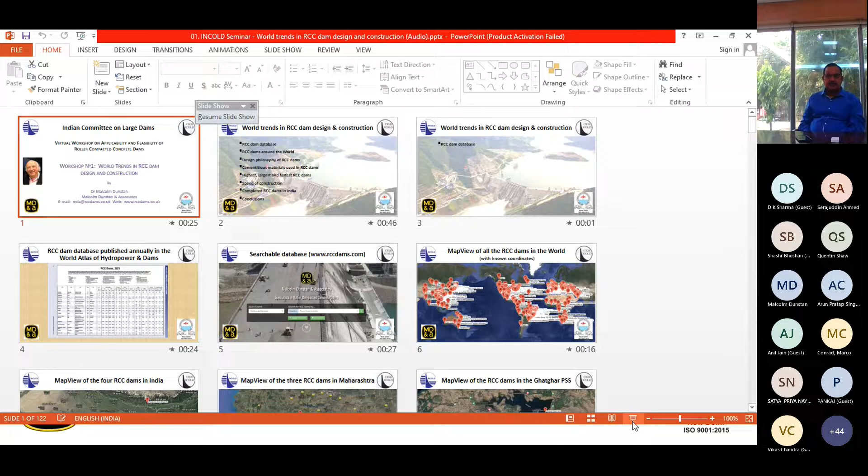I'll be talking about world trends in RCC dam design and construction, how things have changed over the last decade or so, and the position with RCC dams at this present moment. I'll first look at an RCC dam database that we've been maintaining for about 30 years. Secondly, I'll look at RCC dams around the world.

Then look at the design philosophies of RCC dams, the cementitious materials used in RCC dams, the highest, largest and fastest RCC dams, and then the speed of construction, which is the main advantage of RCC dams. And I'll look at the 4 completed RCC dams in India, and finally draw some conclusions.

As mentioned, we've been maintaining a database of all the RCC dams in the world for nearly 30 years, and a summary table of that database is published annually in the World Atlas of Hydropower and Dams, and this is the first page of the latest version. However, you can search for any RCC dam with the searchable database on our website.

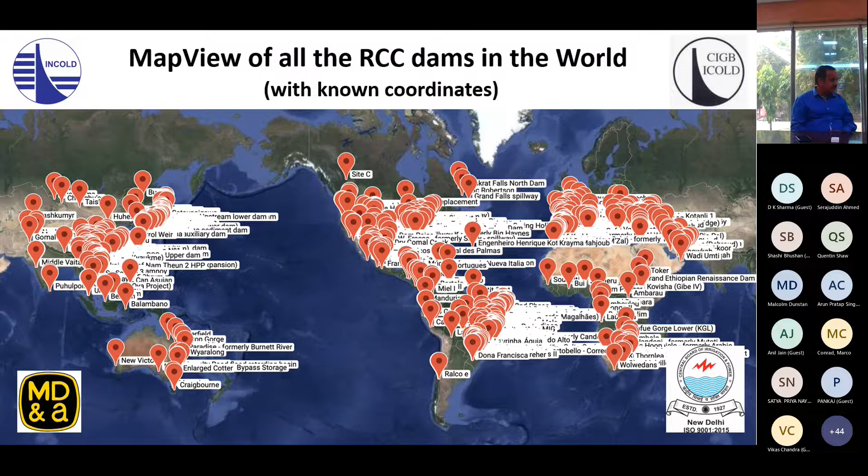And these are the 4 RCC dams which have been completed in India to date, 3 of them in Maharashtra and 1 in West Bengal, and I will talk about these later.

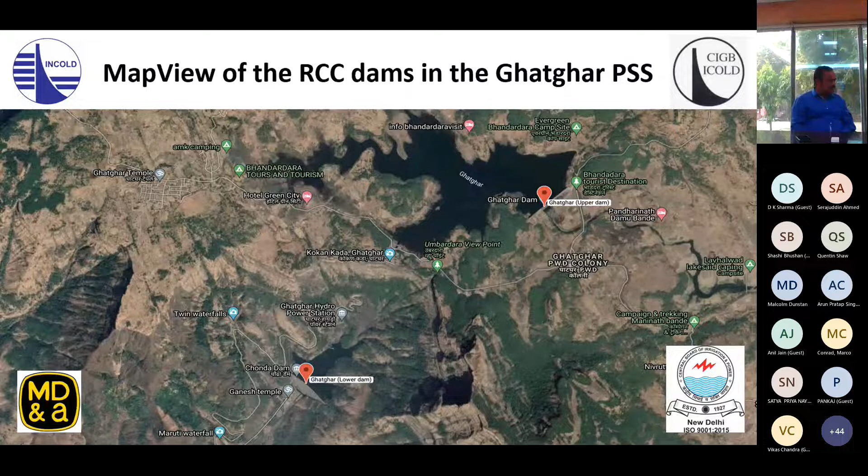These are the 3 in Maharashtra, Middle Vaitarna, the 2 dams at Ghatghar, the upper dam and the lower dam. Here is the Ghatghar project, which I'll be talking about later. And here is the Ghatghar lower dam.

Now the RCC dams around the world. I'll first look at the number of RCC dams and then the distribution of those dams around the world.

At the moment, there are 956 known 15-meter plus high RCC dams, for which we have details. Of those, 886 are complete with an RCC volume of 370 million cubic meters, and a further 70 are under construction with another RCC volume of 32.5 million cubic meters. In other words, there are over 400 million cubic meters of RCC in dams, either complete or under construction.

Of those dams, 805 are over 30 meters high, and of those, 741 are complete with a volume of 355 million cubic meters, and a further 64 are under construction with an RCC volume of 30 million cubic meters. 11.6% of the 30-meter plus high completed dams are arch or arch gravity dams.

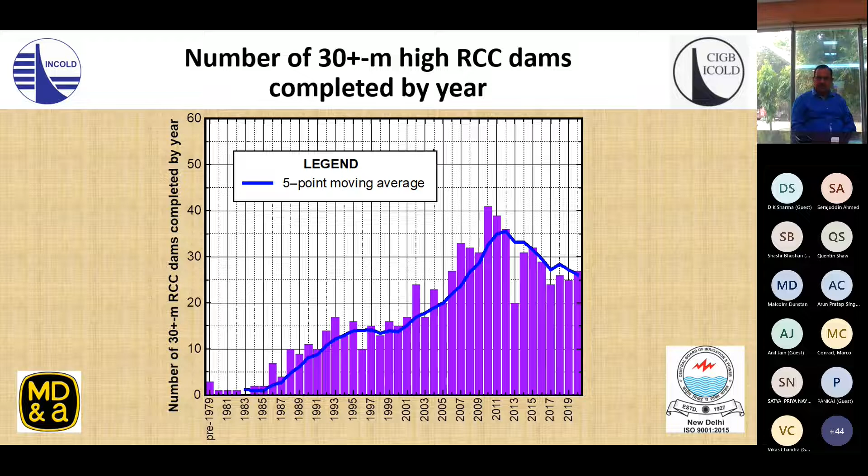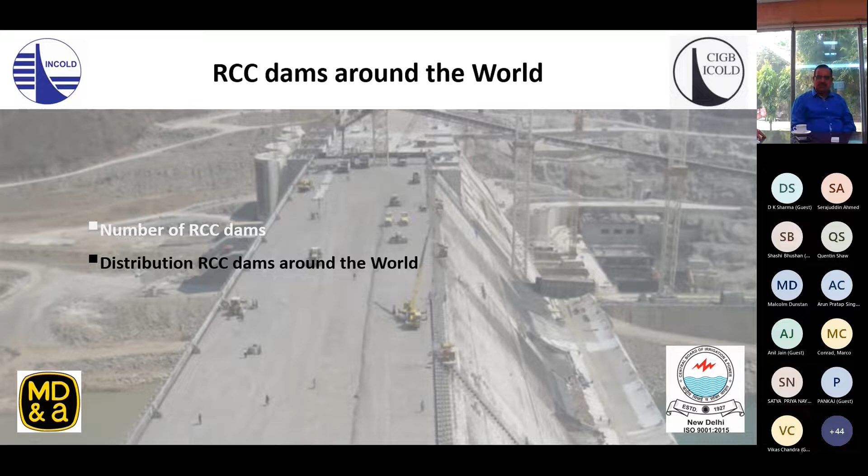If we look at the distribution pictorially, you can see that over 50%, in fact 53.2% of all the RCC dams are built in just 3 countries, China, Turkey and Brazil. And apart from those, the 12 mentioned before, the rest of the world accounts for only 18.6% of all the RCC dams.

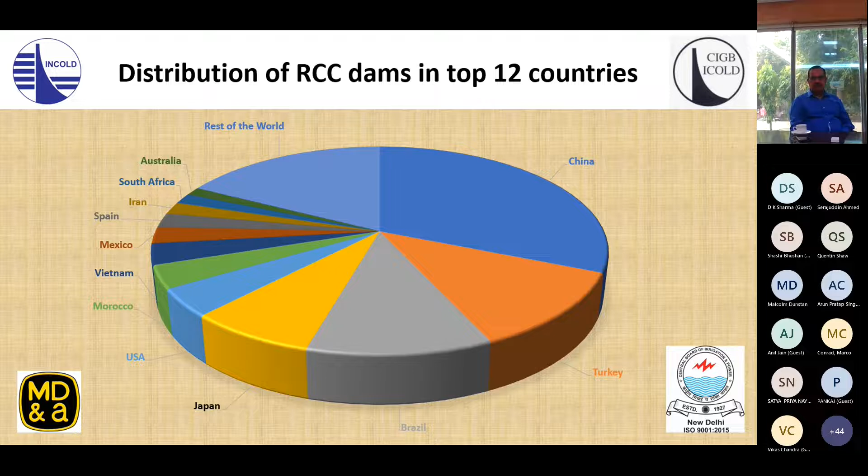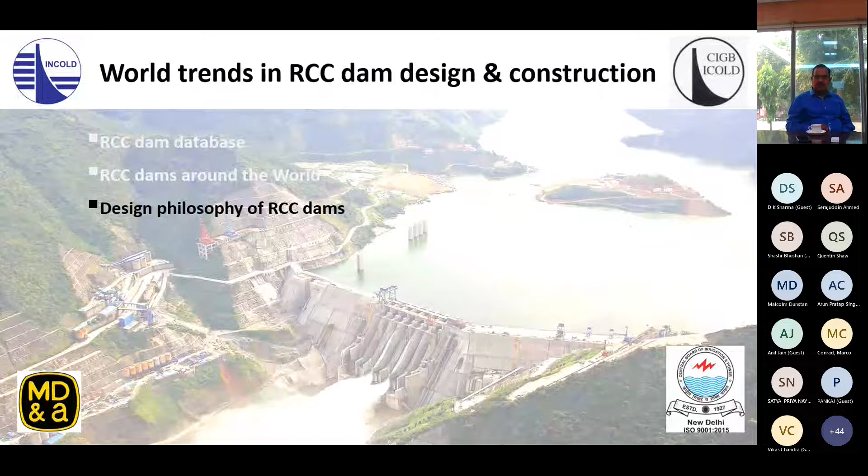We'll now look at the design philosophy of RCC dams. We'll first look at the different approaches to the design of RCC for dams. Then look at the proportion of RCC dams using those different design philosophies. And then we'll look at the average mixture proportions of the different design philosophies.

There are 5 approaches to the design of RCC for dams. The first one is for hard-fill dams. Second one is what's known as low cementitious RCC. We then have RCD dams in Japan, which are unique to Japan. And then we have medium cementitious RCC and high cementitious RCC.

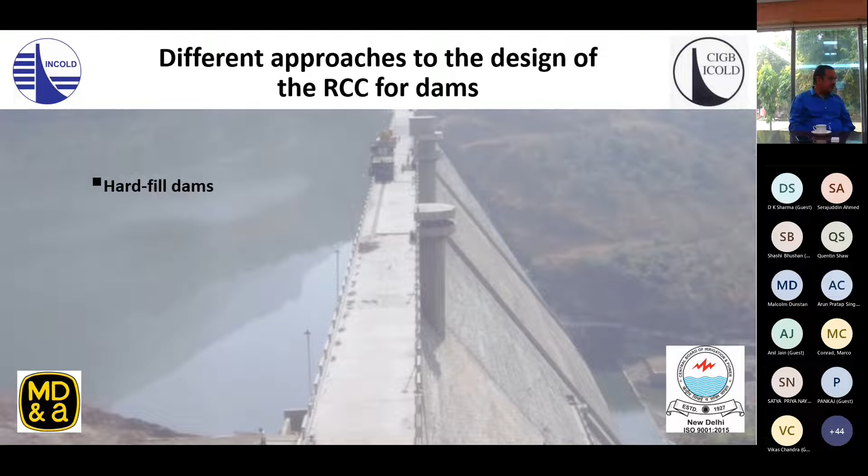We'll first look at hard-fill dams. Hard-fill dams are also been called CSG, compacted sand and gravel dams in Japan, and CMD, cemented material dams, in China. And this name has now been adopted by ICOLD, and there is now a separate ICOLD committee dealing with CMD dams. A hard-fill dam has symmetrical with equal or near equal upstream and downstream slopes, generally somewhere between 0.60 to 1 and 1.10 to 1.

The volume of the dam is usually significantly greater than traditional gravity dams. The cementitious content is relatively low, or surprisingly, it is in fact over 100 kilograms per cubic meter, 104 kilograms per cubic meter.

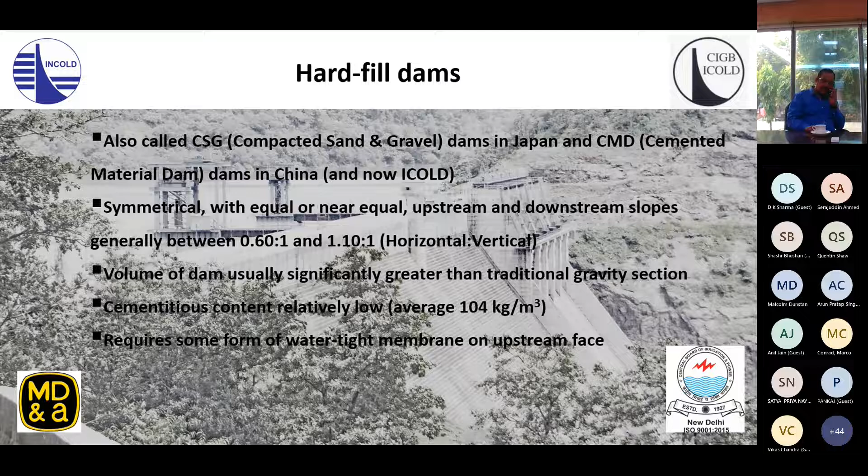Requires some form of watertight membrane on the upstream face. No treatment nor bedding mix is required in the horizontal joints because the design does not depend upon any shear strength or tensile strength of those joints. And no vertical contraction joints are required.

The first hard-fill dam in the world was a small dam in the southwest of the UK called New Mill. It wasn't called a hard-fill dam, it was just a solution to a number of problems. And there were 3 major problems.

The first was that the foundations were very poor, and so the load was spread with upstream and downstream slopes of 1 to 1.

The second problem was it had to be a concrete dam because it all had to act as a spillway, being a flood retention dam, but it is an area of outstanding natural beauty, and the planners did not allow any concrete to be shown. And the third problem was that the concrete had to come from a ready-mix plant.

The travel time from that plant could vary anything from 20 minutes to 2 hours, depending upon the traffic, as the dam was built in a tourist area in the summer.

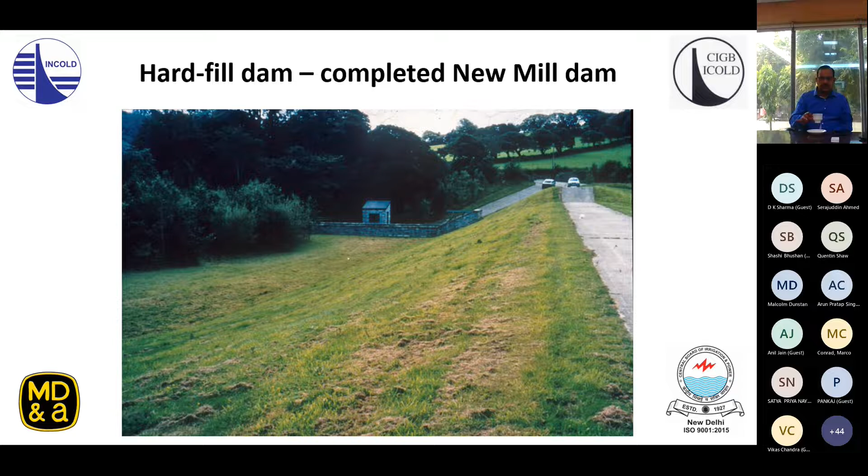Now let's look at low cementitious RCC dams. Generally, they have a gravity section, although the downstream slope can be flatter than usual. The cementitious content is less than 100 kilograms per cubic meter. The SCM, that's the supplementary cementitious materials, content is usually relatively low.

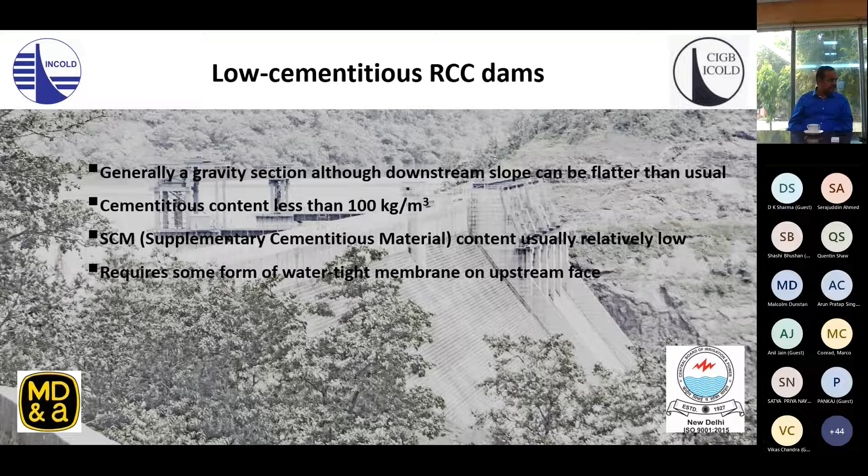It requires some form of watertight membrane on the upstream face. Frequently a full or a partial bedding mix is used on all horizontal joints. Vertical contraction joints are required.

Here is a photograph of probably the most typical and the first low cementitious RCC dam, Willow Creek. It's under construction in the USA. You can see from the photograph the RCC was transported by scraper, which is, I think, fairly unique. It was spread by a dozer and then compacted by twin drum vibratory rollers.

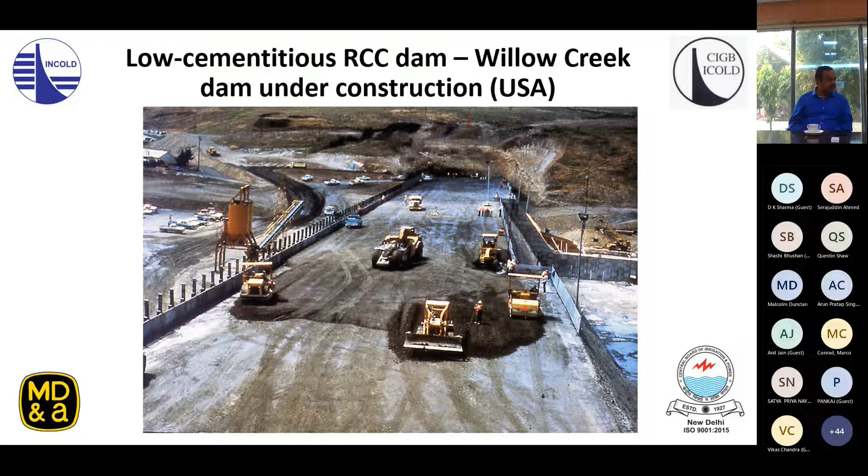When the dam was first constructed, it was drawn down almost immediately, and a significant amount of money was spent trying to grout the dam. Some people believe successfully. I don't believe that successfully.

We'll now look at RCD dams in Japan. These are generally a gravity section, although usually there's an upstream fillet due to the high earthquake loading in Japan.

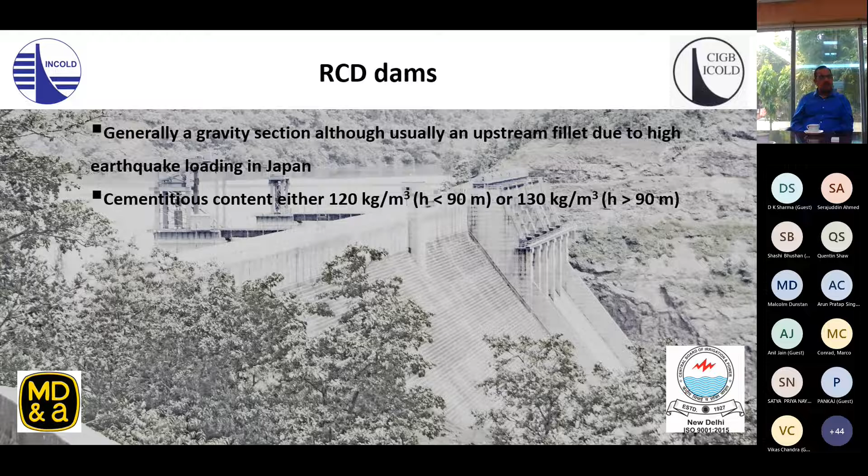The cementitious content is either 120 kilograms per cubic meter when the height of the dam is less than 90 meters, or 130 kilograms per cubic meter when the height is more than 90 meters. Low-lime fly ash is used as an SCM and is usually 30% of the cementitious content.

The RCC is placed in thick horizontal lifts, somewhere between 0.5 and 1 meter thickness. Most popular seems to be 750 millimeters, and 3 layers of RCC are spread for each horizontal lift.

There's a thick, usually about 2.5 meters wide width of facing concrete on the upstream face and a 1.5 meter width on the downstream face. All the horizontal joints are green cut and a full bedding mortar applied. And vertical contraction joints are required. They're either formed or induced.

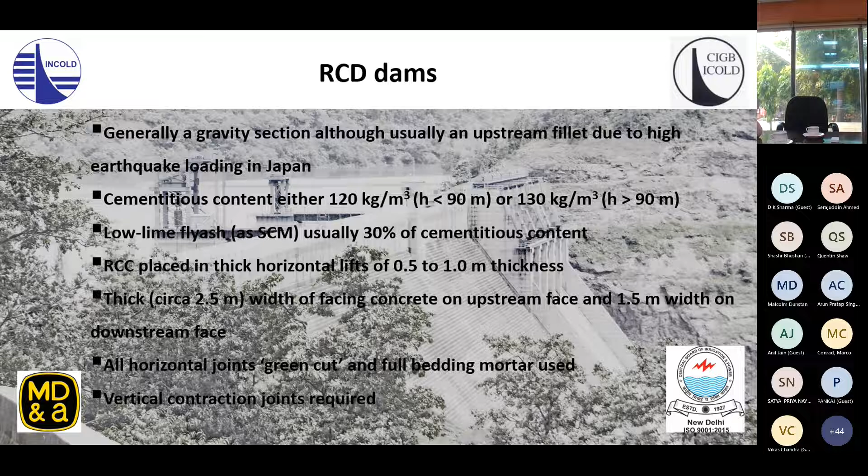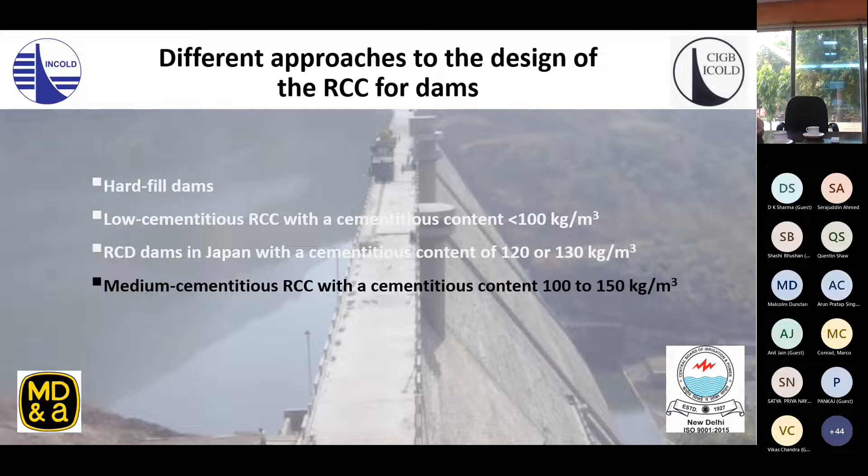If we look at the medium cementitious RCCs now, this is generally a gravity section. The cementitious content is between 100 and 150 kilograms per cubic meter. The SCM content is usually 30 to 40%. Occasionally some form of upstream watertight membrane is used, but usually not. Horizontal joints range from no treatment with hot joints and no bedding mix to a full green cut and a full bedding mix. Vertical contraction joints are required.

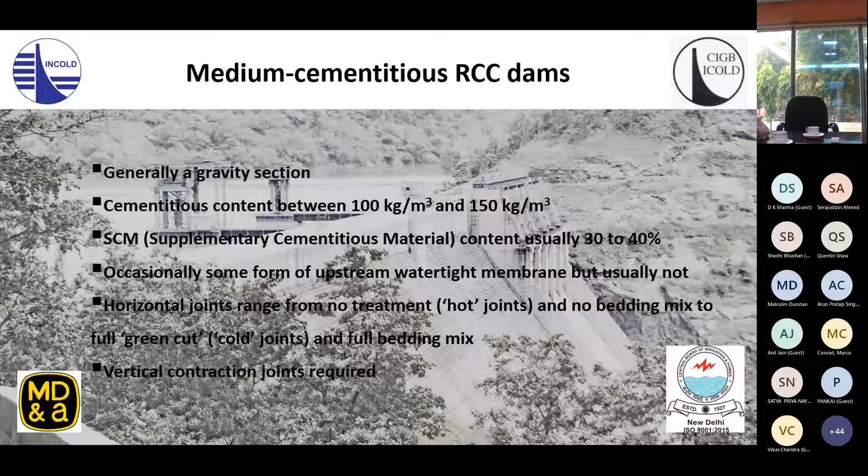This is a photograph of Copperfield Dam, which is one of the first, if not the first, medium cementitious RCC dams constructed in Australia. One particular feature of this dam was that it had an unformed downstream face with no formwork.

This is the completed dam, and in the foreground you can clearly see the problems with the unformed face, because it was not possible to form a face at the design slope, and the slope was slightly less. The downstream face should have been parallel to the top of the training wall, and it was not, and the dam got a little bit thin towards the top.

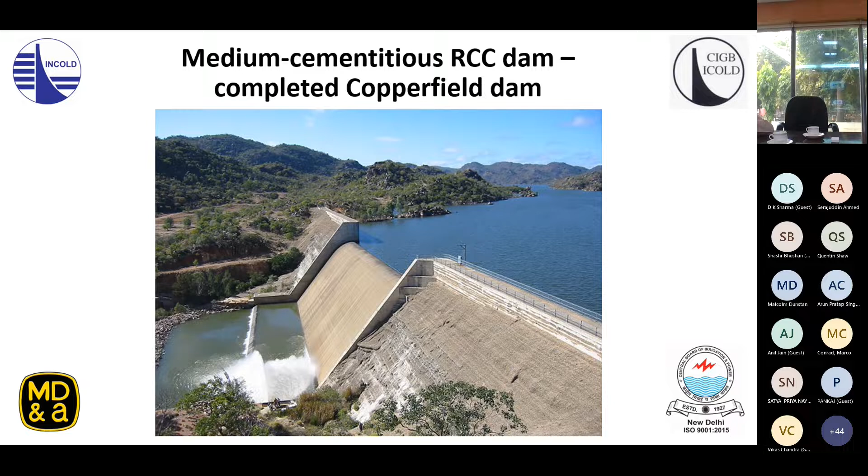Now let us look at high cementitious RCC. The dams generally have a gravity section, although also used in arch and arch gravity dams. The cementitious content is more than 150 kilograms per cubic meter, and that figure is not grabbed from the sky. It was defined back in the early 1980s, at the point where the impermeability of RCC dams equaled that of traditional concrete gravity dams. Below 150 kilograms per cubic meter, RCC dams were less impermeable than traditional concrete dams, but above 150, RCC dams can be more impermeable than traditional concrete gravity dams.

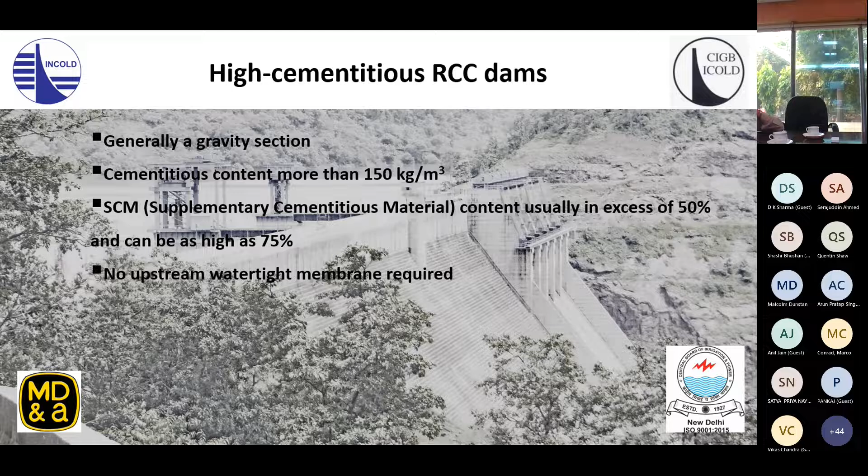The SCM content is usually in excess of 50% and can be as high as 75%. No upstream watertight membrane is required because, as I mentioned, it's impermeable. Horizontal joints range from no treatment on hot joints to a full green cut on cold joints, and from no bedding mix to an occasional full bedding mix. However, a number of high cementitious RCC dams have been completed with no bedding mixes whatsoever, and vertical contraction joints are required.

This is Upper Stillwater Dam, which was the first large high cementitious RCC dam in the world, just under 100 meters high, with a volume just over 1 million cubic meters. It was built in the early 1980s, and the fundamental problem on this site was that the long-term average temperature is 0.5 degrees, and the temperature range is 70 degrees, from -35 in the winter to +35 in the summer. The construction season was 5 months, give or take a couple of weeks, depending upon the winter.

During the summer, when the RCC was placed overnight, the maximum placing temperature was 10 degrees. During the day, the faces were formed using an offset slip form paver, and there was no formwork on this particular dam.

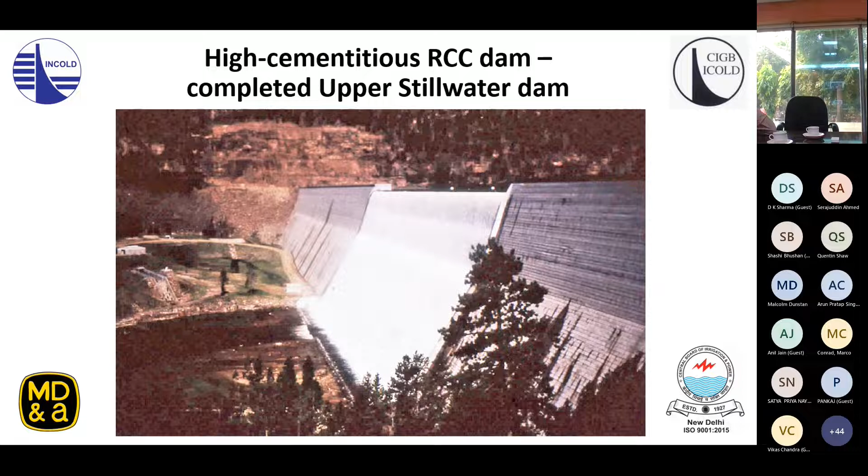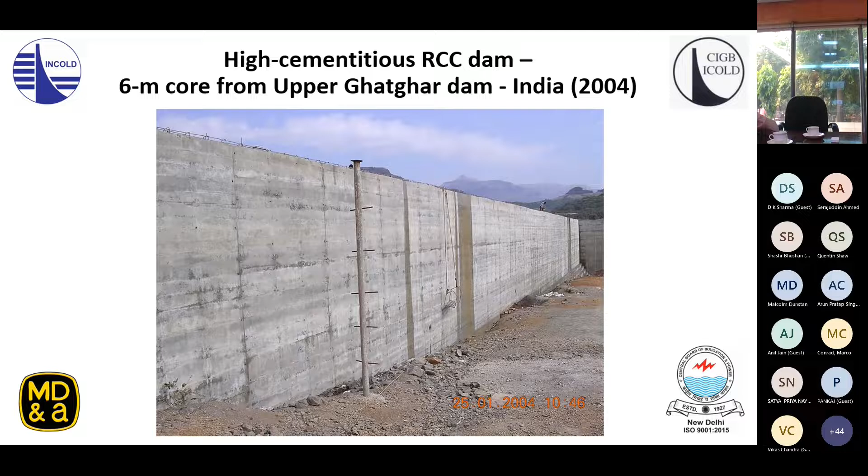In 2004, this is a 6 meter long core taken from the Upper Ghatghar Dam. You may think a 6 meter long core is not particularly good, but if you look at the drilling rig which was used, that gentleman there did an extremely good job to get a 6 meter core out in one piece.

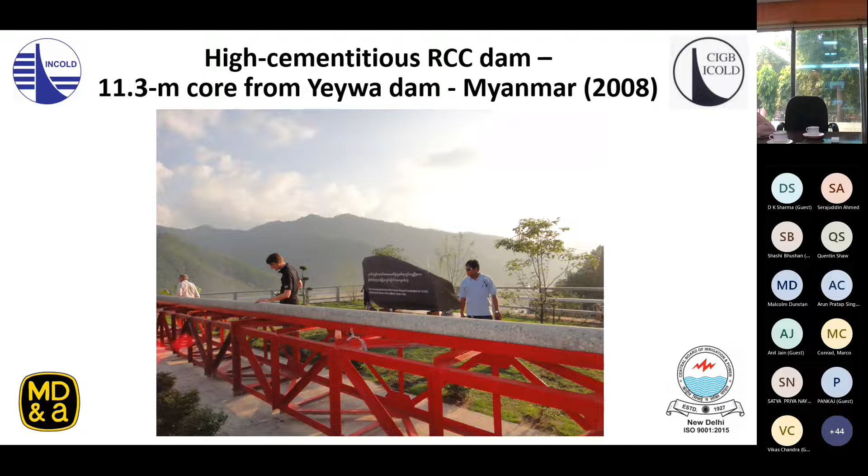The same year, a 15.3 meter core was taken from Longtan.

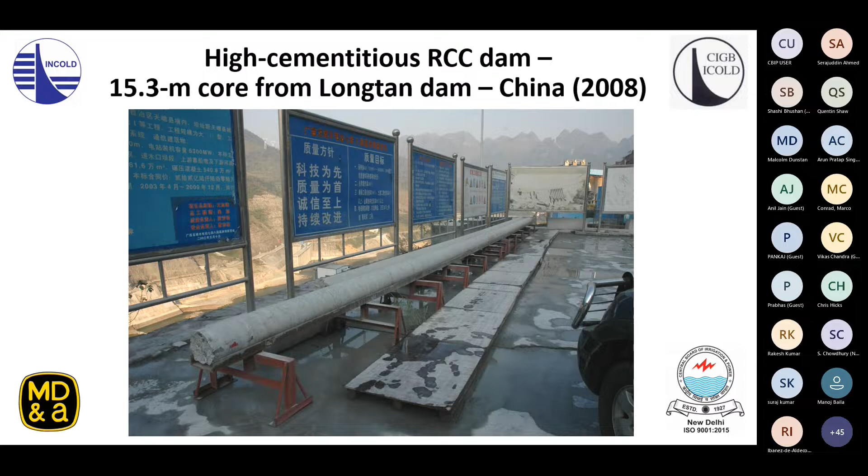Now let's look at the proportion of RCC dams using different design philosophies. If we look at the numbers of RCC dams, just under 50% of all the RCC dams for which we know the mixture proportions are high cementitious RCC, but about 18% we do not know. If we take out those unknown dams, we find that 60% of all RCC dams contain high cementitious RCC, 7.5% contain hard fill. Now that figure is a great underestimate because I do not have details of all the hard fill dams, since they have been taken away from the ICOLD concrete committee and another committee has been set up. Around about 8% are low cementitious, a further 8% RCD, and about twice that medium cementitious.

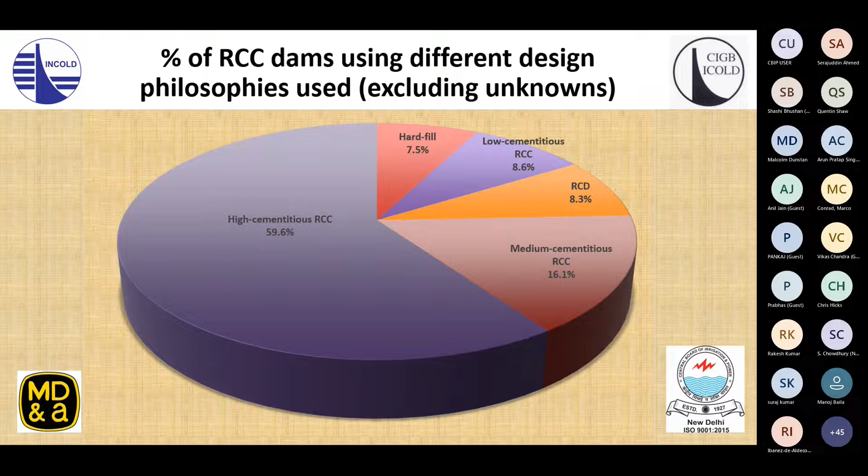Now let's look at the average mixture proportions of the different design philosophies. If we look at the Portland cement content, what is perhaps surprising is the Portland cement content of at least 4 of the 5 are very similar, between 80 and 87. The low cementitious RCC is slightly lower. What is the big difference between the various forms is the SCM content, where we have with the hard fill and the low cementitious relatively low, 15 to 25, with the medium cementitious and RCD 35 to 40. Meanwhile, with the high cementitious RCC, it's very much higher, well over 100 kilograms per cubic meter.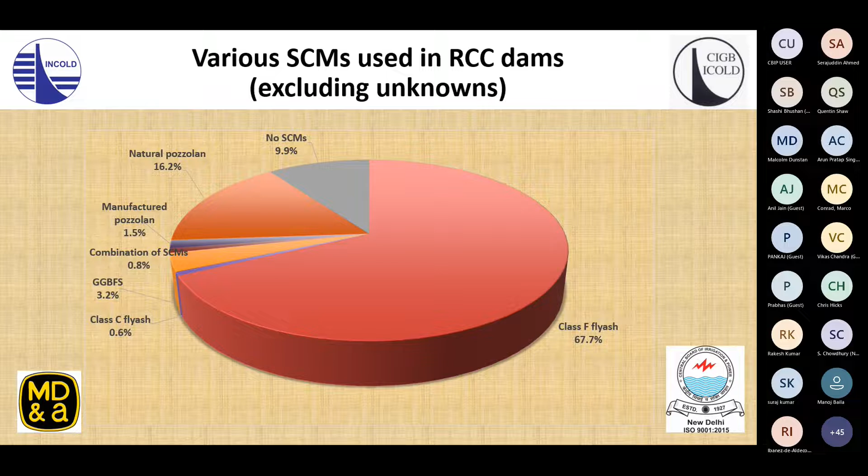Now let us look at the cementitious materials used in RCC dams. If we look at the position, we find just over 50% of RCCs contain Class F fly ash, that's low-lime fly ash. However, I have no records of 22.5%. So if we take out the unknowns, we find that 67.7% of RCCs contain Class F, that's low-lime fly ash. Very few contain Class C, that's high-lime fly ash. A little more contain slags, that's granulated blast furnace slag. Combination of SCMs, which was quite popular in the early days, is now reduced to less than 1%. The manufactured pozzolans are a bit more. Natural pozzolan is quite significant now, 16.2%, and no SCMs, in other words just Portland cement, is a fraction less than 10%.

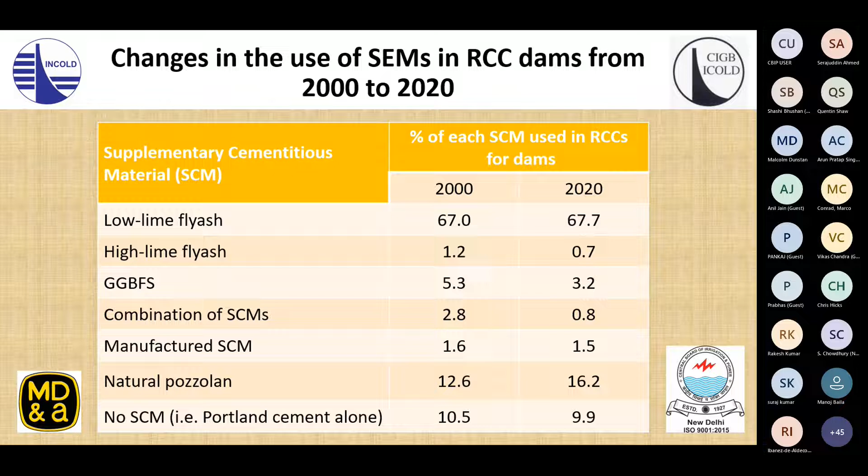Now, if we look at the changes which have occurred since the year 2000: low-lime fly ash hasn't changed, 67 to 67.7%. High-lime fly ash has dropped a bit, 1.2 to 0.7. Slag has dropped a bit. Combination of SCMs dropped quite a lot. Manufactured SCM roughly the same. Natural pozzolan's gone up, and no SCM, Portland cement alone, has gone down a fraction.

Let us now look at the highest, the largest, and the fastest RCC dams. We'll first look at the highest, then the RCC dams with the greatest RCC volumes, and then the RCC dams with the highest average rates of placement.

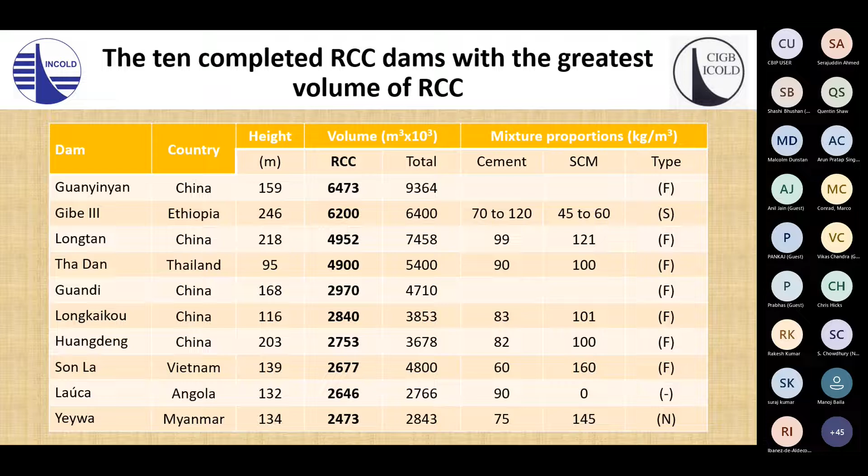Now we look at the RCC dams with the highest average rates of placement. In order to get into the top 10, you need to have an average rate of placement in excess of 85,000 cubic meters a month.

Now, I personally find this slide very disappointing, as there are only 7 completed RCC dams in the world which have an average rate of placement in excess of 100,000 cubic meters. The highest is stage 1 of Longtan, with an average rate of placement just under 143,000. But notice in the peak month there, 400,000 cubic meters was placed. That's over 1 million tons of material placed in the dam in 1 month.

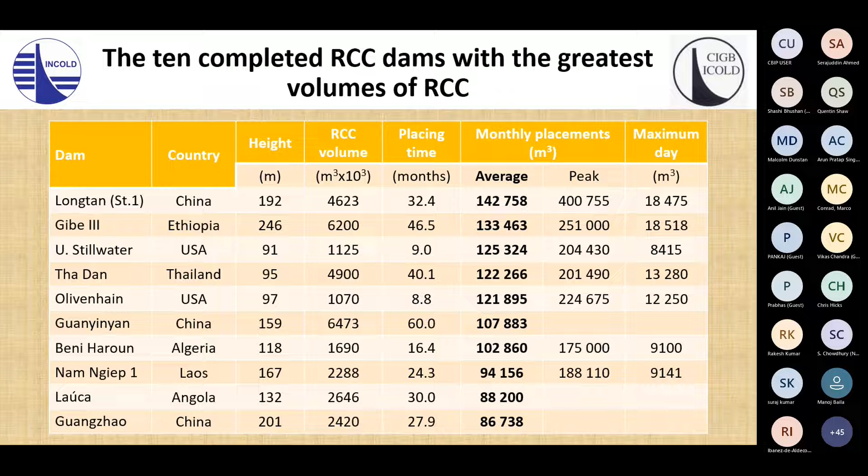What is different here, whereas in the previous 2 slides 80% of the dams have been in China, here it's roughly 50-50. 50% are in Asia and 50% are outside Asia.

Now, 98% of all the RCC dams fall within that range shown there. You can see that there are two dams way above that limit, Upper Stillwater and Olivenhain, both of which happen to be in the United States. And you can see on the right 3 dams which are well behind the rate of placement they should have achieved.

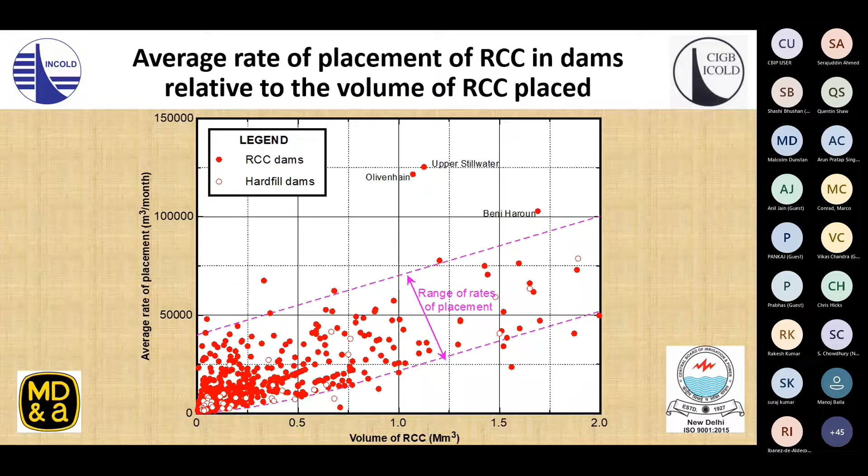This is a photograph of the overall placement in the spillway half of the Yeywa RCC dam in Myanmar. It shows very clearly that if the RCC is well designed and the construction methodology is well organized, the placement of RCC can look very simple. In fact, it's not simple.

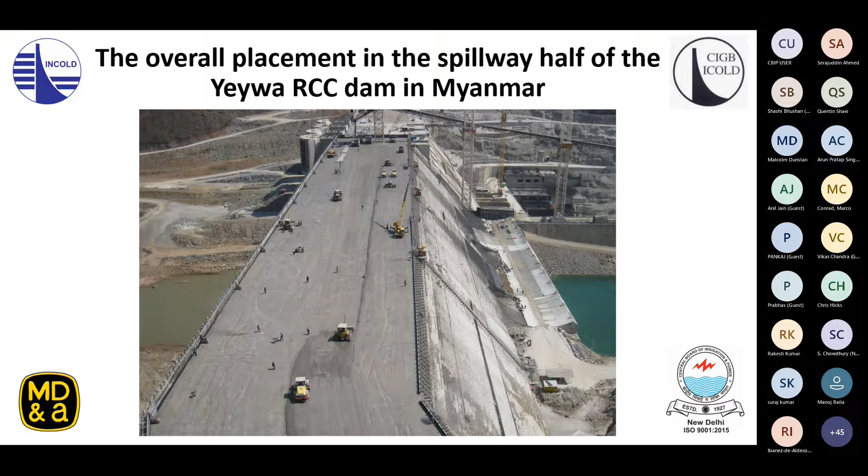KISS. Keep it simple. Simplicity is the ultimate sophistication - da Vinci. Amongst everything else, he was probably one of the best engineers that has ever been born.

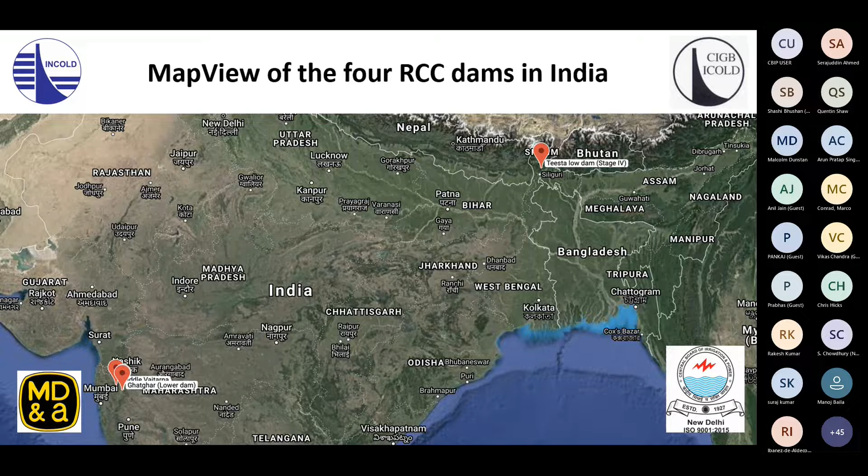Now let us look at the 4 completed RCC dams in India. We have 3 in Maharashtra - the Ghatghar Upper Dam, the Ghatghar Lower Dam, Middle Vaitarna - and we have 1 in West Bengal, the Teesta Low Dam, stage 4. We'll first look at the Upper Ghatghar Dam and the Sattal Dam, then the Lower Ghatghar Dam, then Middle Vaitarna, and then Teesta Low Dam, stage 4.

The Sattal Dam was the first one constructed, only 9 meters high, and one could say that was a full-scale trial for the upper dam, which is 15 meters high, which in turn was a full-scale trial for the lower dam, which is 86 meters high.

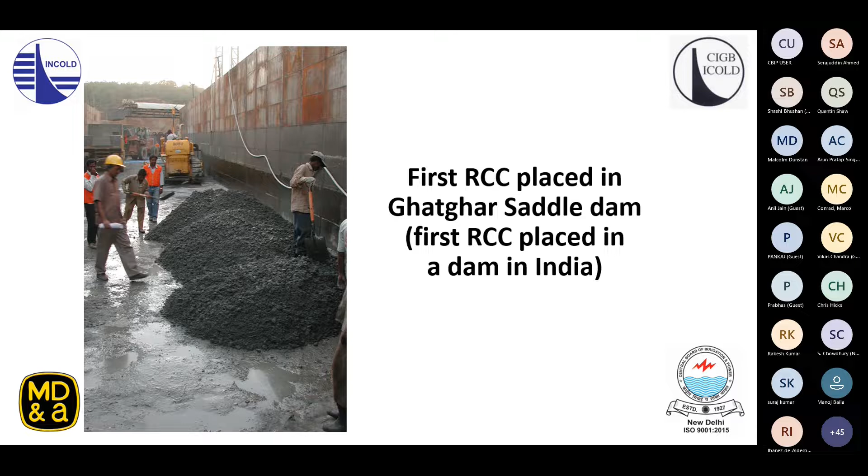This is a photograph of the placement in one half of the Saddle Dam. The Saddle Dam was split into 2 halves because it was quite long.

This is a photograph showing the overall process. One can see in the background the conveyor which transported the RCC to the dam. Then it was dumped into the trucks - you can see the trucks then dumping the RCC, again with no segregation. Then it was spread and roller compacted.

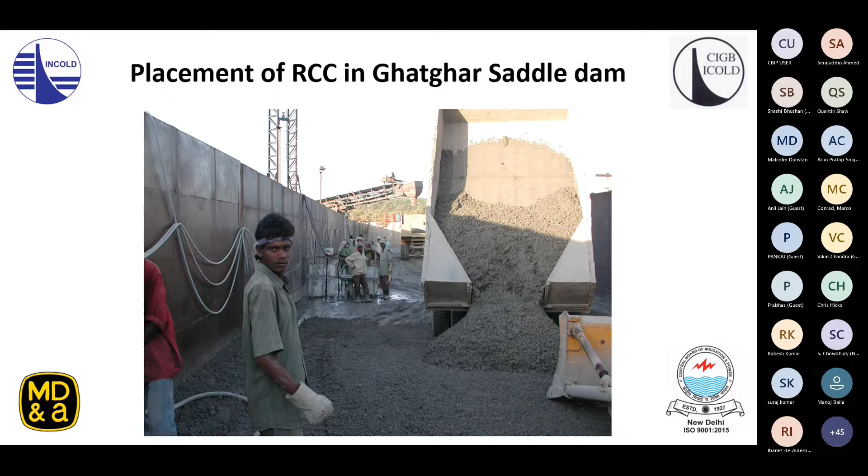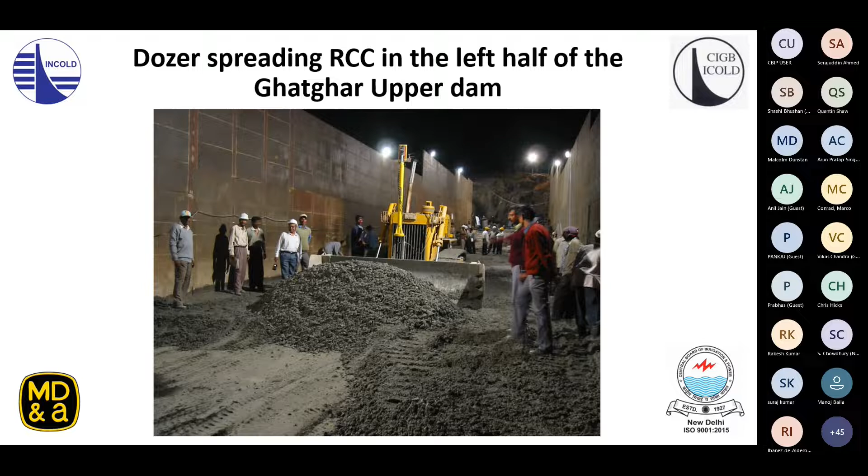This is the dozer spreading the RCC in the left half of the Ghatghar Upper Dam. Again, you can see there's no segregation. The dozer is laser guided and has wings on either end of the blade, trying to avoid segregation going around the edge of the blade. The upper dam was split into 2 halves of RCC, and in the middle was the spillway, which was constructed of CVC, conventionally vibrated concrete.

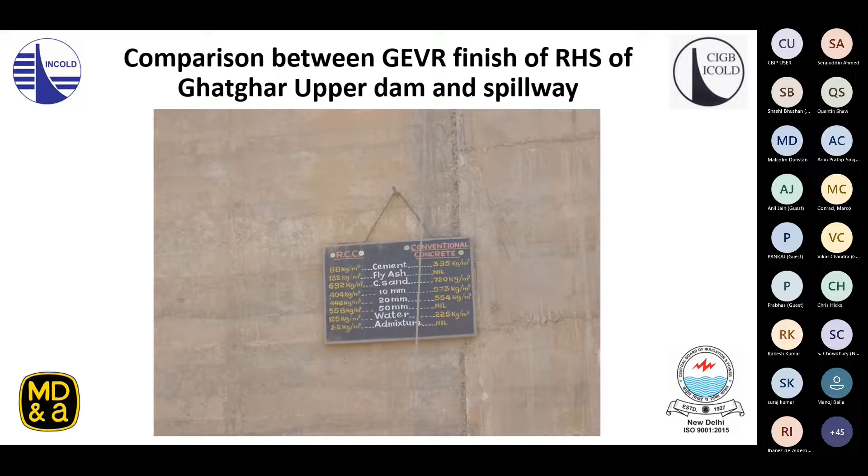The owner took this photograph - that's GOMID, the Government of Maharashtra Irrigation Department - comparing on the left the finish of the RCC, and on the right the finish of the conventional concrete in the spillway. I leave it to your own judgment, but the great majority of people feel the finish on the left, the RCC, is at least equal, if not better, to the finish of the conventional concrete on the right, in spite of the cement content being less than a quarter in the RCC.

This is a schematic showing the process, alternating from the left-hand side to the right-hand side, placing 3.6 meter lifts made up of 12 layers. When you finish one half, you move over to the other half. Ideally, a swinger should be placed on the joint in between the two, so from one location you can feed both sides.

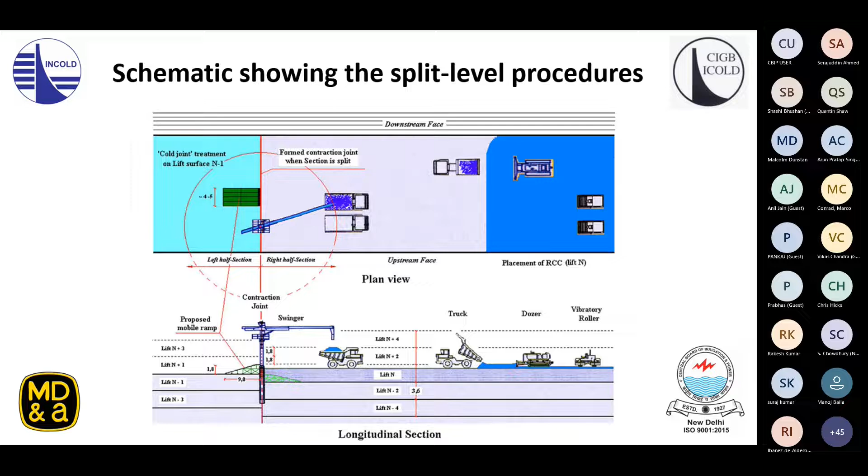This photograph clearly shows one of the main advantages of the split level placement methodology. You can see that RCC is being placed on the far side, the left half of the dam, while at the same time the formwork for the galleries is being erected on the right half. In other words, installing the gallery formwork has no impact at all on the rate of placement.

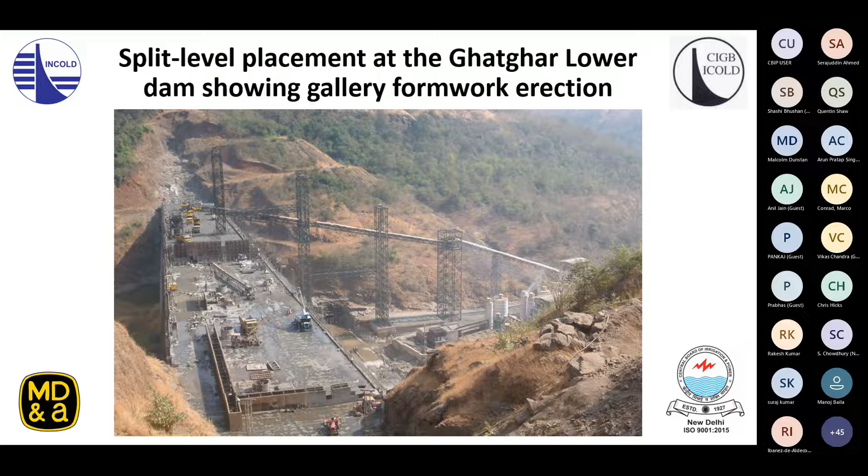This is a photograph of the completed Ghatghar Lower Dam. You can see on the right half of the photograph there is absolutely no seepage whatsoever from the downstream face.

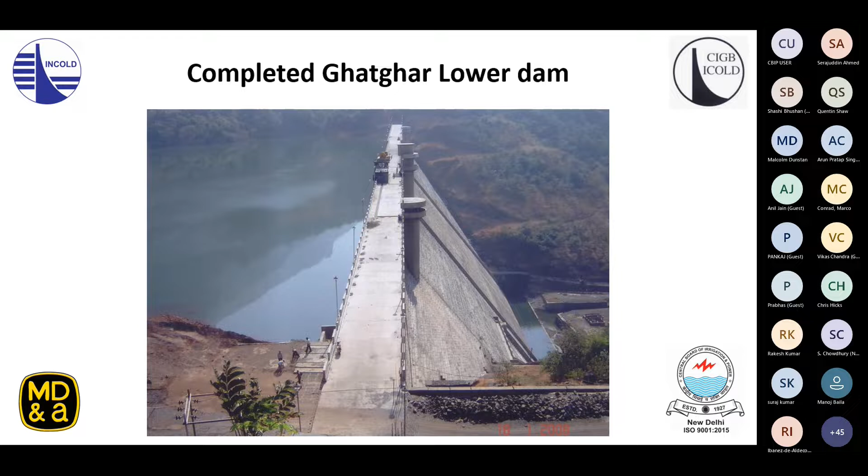Now let us look at Middle Vaitarna Dam. Split level construction was used again, and this is the placement of the RCC in the left half of the dam.

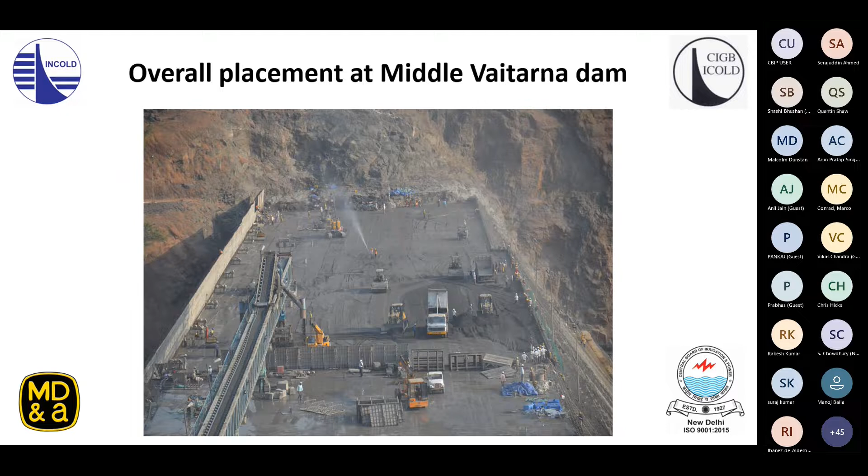The difference between the methodology at Middle Vaitarna compared to Ghatghar was that the RCC was transported along a longitudinal conveyor, as opposed to coming from the downstream side. At points along the conveyor there were twin loading points which could load trucks. This is the RCC being roller compacted with a single drum vibratory roller.

This is GEVR, which has been used for forming the faces of all the RCC dams in India, and the majority of RCC dams now.

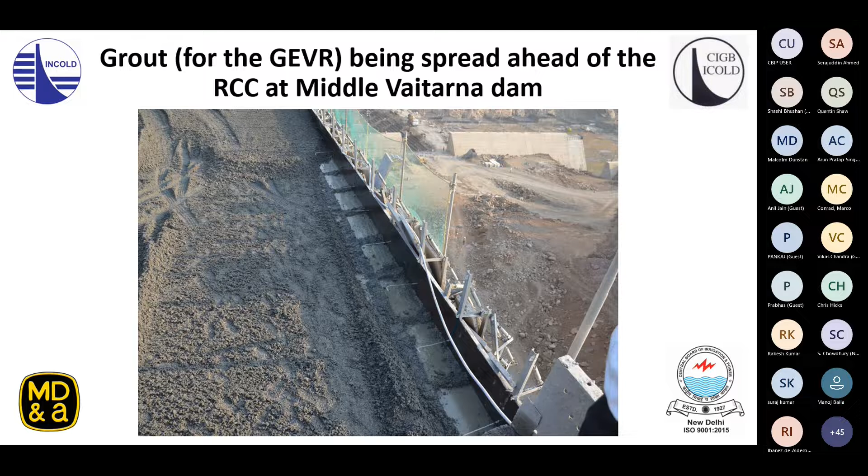Ahead of the spreading of the RCC, bunds are formed and grout is placed in those bunds. The RCC is then spread over the top of the bunds, and the GEVR is vibrated, working the grout up through the RCC to essentially form a vibratable concrete. This created the excellent finish shown for the upper dam at Ghatghar.

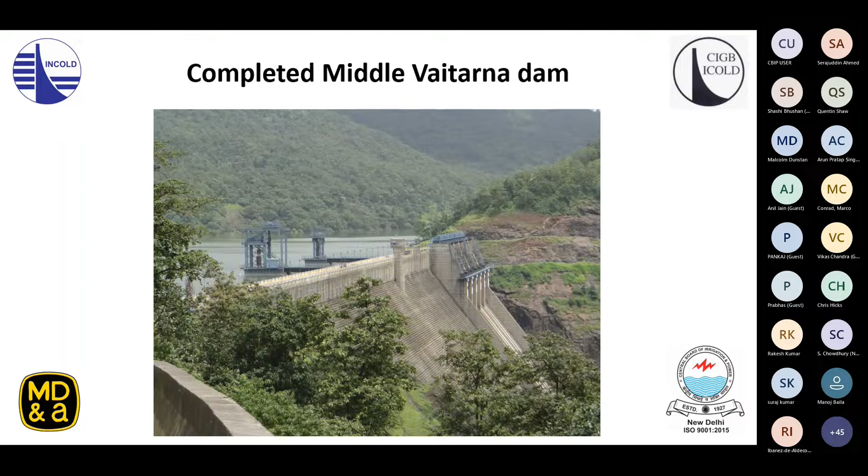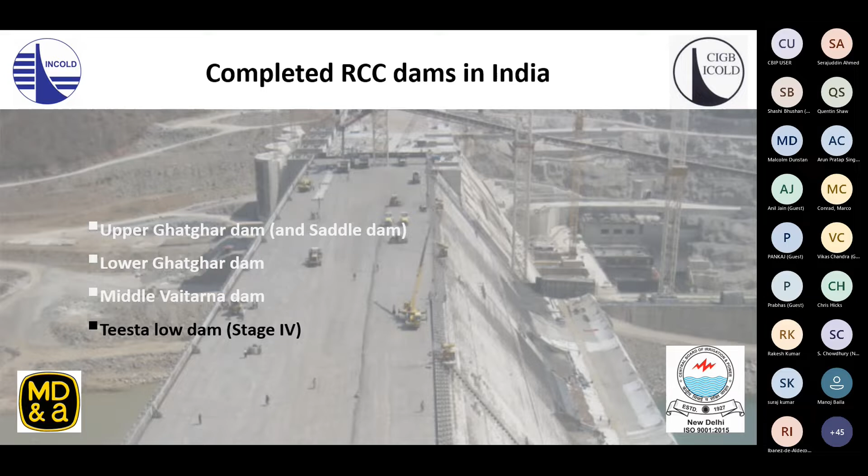This is the last completed RCC dam in India, Teesta Low Dam Stage 4. This shows an overview of the project. In the far distance is the powerhouse, and in the middle is the spillway, through which the river is being diverted at the time this photograph was taken.

In the foreground is the RCC dam closure section, and the RCC placement has just started in the left half of the closure section.

This shows more detail of that placement. It can be seen that the RCC comes along a conveyor from the upstream side and is put into trucks. The trucks, as you can see near the downstream face, dump the concrete, and then it is spread by dozer and compacted by vibratory roller.

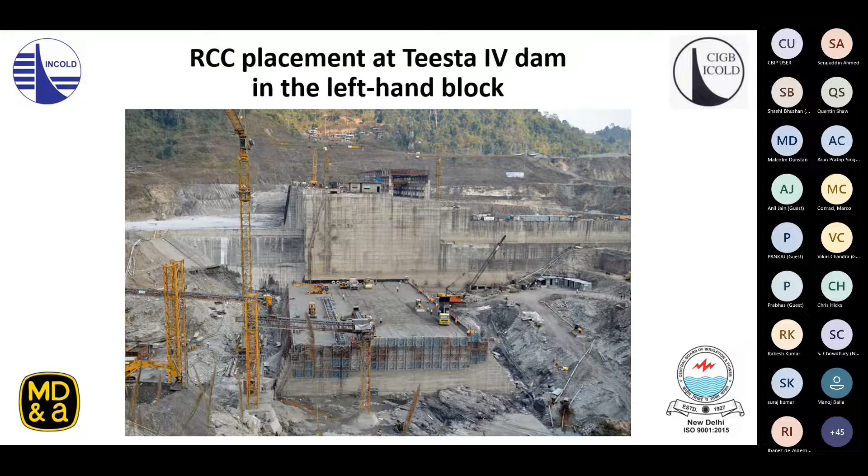You can also see the formwork there for the gallery, and here's a close-up of the RCC being placed in the left half of the dam around the gallery.

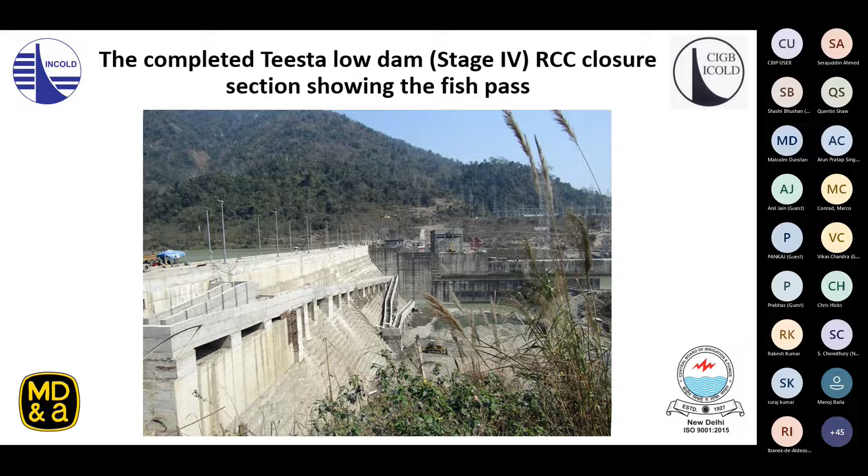Now let us draw a few conclusions from this presentation. There are approximately 1,000 RCC dams in the world that are either complete or under construction. There is therefore a precedent for practically all conditions.

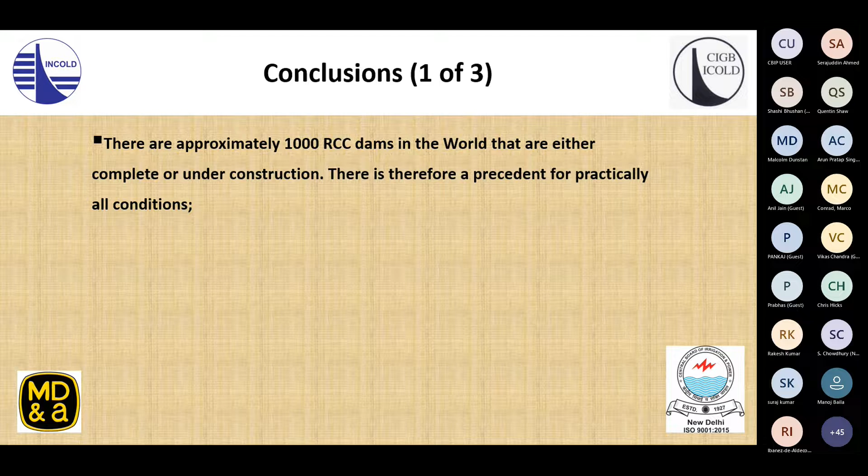A standard RCC dam has emerged over the past decade or so. It is a high cementitious RCC dam, and two-thirds of the volume of all RCC placed in dams to date has been high cementitious RCC. It has high workability, frequently with heavy retardation, with an initial setting time of somewhere between 18 and 24 hours, and it contains a low-lime fly ash as a supplementary cementitious material. As we have seen, two-thirds of all RCC dams contain low-lime fly ash as an SCM.

Obviously there will be conditions when such a dam is not optimum, but it should be the starting point for the design of the great majority of RCC dams.

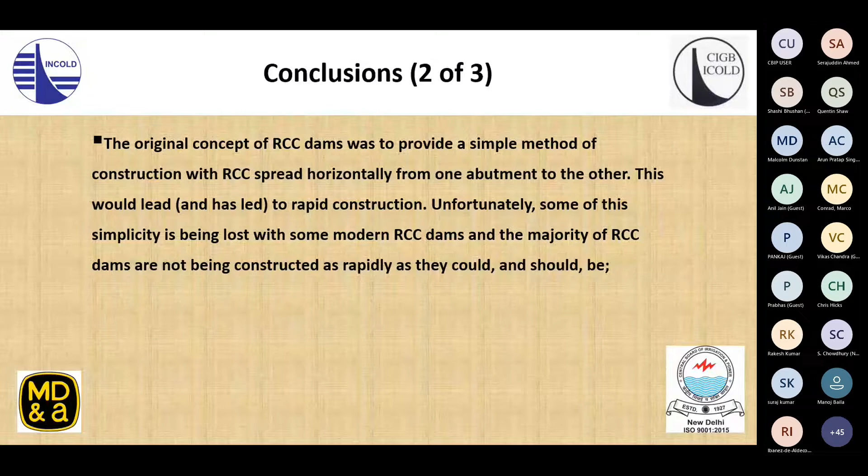The original concept of RCC dams was to provide a simple method of construction with RCC spread horizontally from one abutment to the other. This would lead, and indeed has led, to rapid construction. Unfortunately, some of this simplicity is being lost with some modern RCC dams, and the majority of RCC dams are not being constructed as rapidly as they could and should be.

A holistic view needs to be taken during the design and construction of RCC dams, as every aspect of the design and construction impacts on other aspects. It's counterproductive to concentrate on any particular aspect, e.g. aggregate production, and try to find the minimum cost solution for that particular aspect, as it will almost certainly lead to a more expensive and probably slower overall project.

Investment spent up front on the investigation of the design and construction of an RCC dam will always, and I repeat always, lead to economic benefits. For example, a very detailed study of the available materials and an extensive trial mix program from Moche Dam in Kenya led to the development of an RCC with a Portland cement content of 35 kilograms per cubic meter, and a fly ash content of 185 kilograms per cubic meter. This is probably the most economic and almost probably the most contractor-friendly RCC ever achieved.

This introduction to ICOLD Bulletin 177: we'll start with a look at the history of ICOLD RCC bulletins, discuss Bulletin 126, talk about motivation for the update of 126, changes in terminology included in the new bulletin, key developments in RCC — still don't have the soundtrack — we'll talk about key developments in RCC dam technology, talk about hard fill, and then talk about the workshop presentations. Next slide, please.

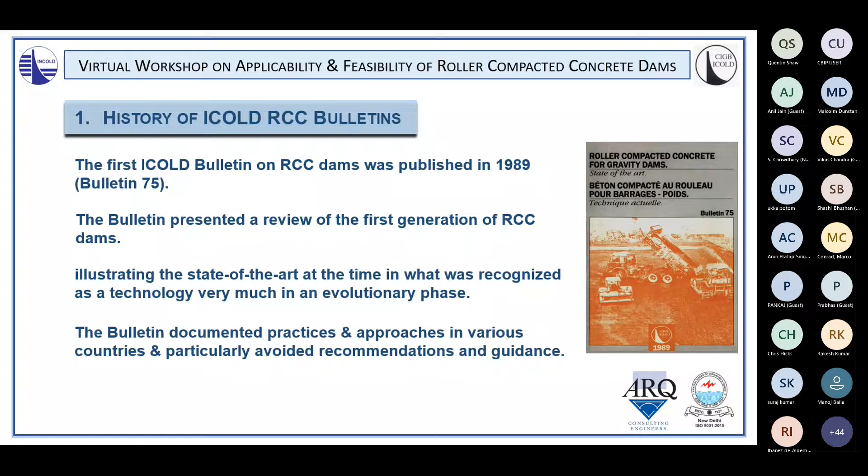The first ICOLD bulletin on RCC dam was published in 1989, bulletin number 75. If you can click down the slide, please. The bulletin presented a review of the first generation of RCC dams, illustrating the state of the art at the time in what was recognized as a technology very much in an evolutionary phase. The bulletin documented practices and approaches in various countries, and particularly avoided recommendations and actual guidance.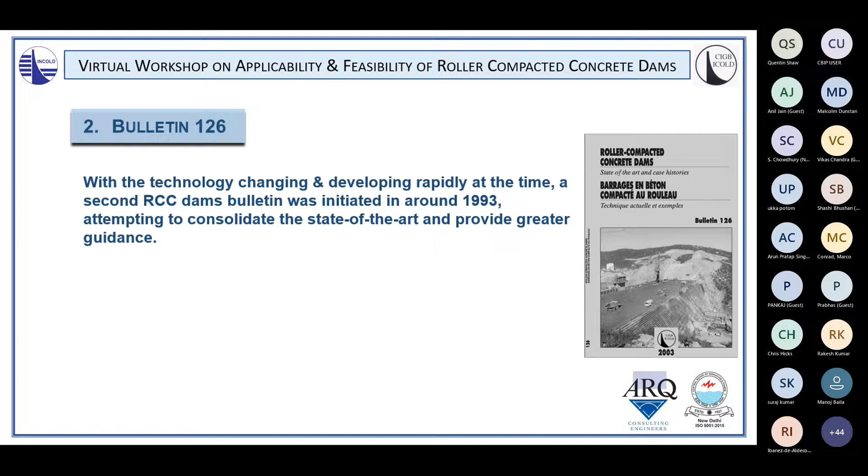So this bulletin — with the technology changing and developing rapidly at the time, a second RCC bulletin was initiated around 1993, attempting to consolidate the state of the art and provide greater guidance in best practice in RCC. After a difficult process of compilation, this bulletin was finally published in 2003 as ICOLD Bulletin number 126. This bulletin particularly differentiated between two approaches for RCC dam design, being the overall and the separate approach, with impermeability created in the RCC itself for the overall approach, and a reliance on a separate impermeable barrier in the case of the separate approach.

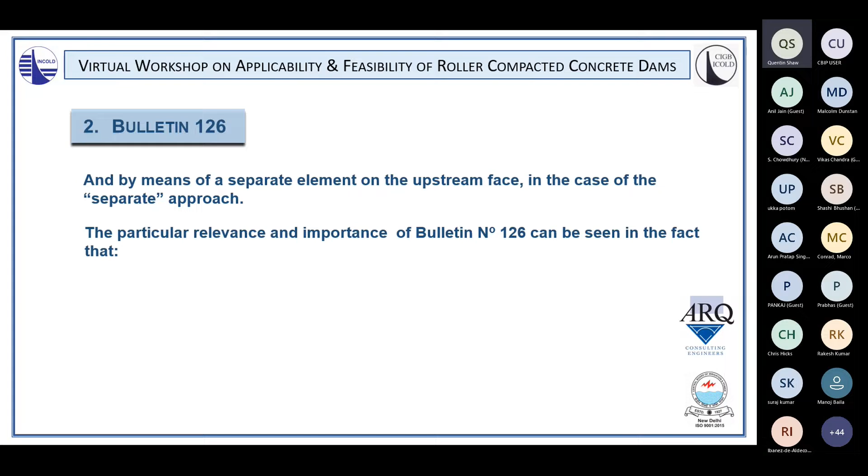The particular relevance and importance of Bulletin 126 can be seen in the fact that the bulletin had the highest print numbers of any ICOLD bulletin until that point in time, and was translated into more languages than any other ICOLD bulletin to that point. This was a very important bulletin for ICOLD and a very important bulletin for the dam design and building industry.

It's undoubtedly true that Bulletin 126 provided a great deal of very useful guidance for a particularly prolific stage of RCC dam construction. If you remember from Dr. Malcolm Dunstan's presentation, there was a very steep curve of RCC dam development around and after the period this bulletin was produced, and it was undoubtedly very instrumental in that period of RCC dam development. Next slide, please.

Bulletin 126 put forward several new ideas and concepts, but for which little experience in terms of practical application existed at the time. It really modernized, in terms of concept, what had been done up until that time.

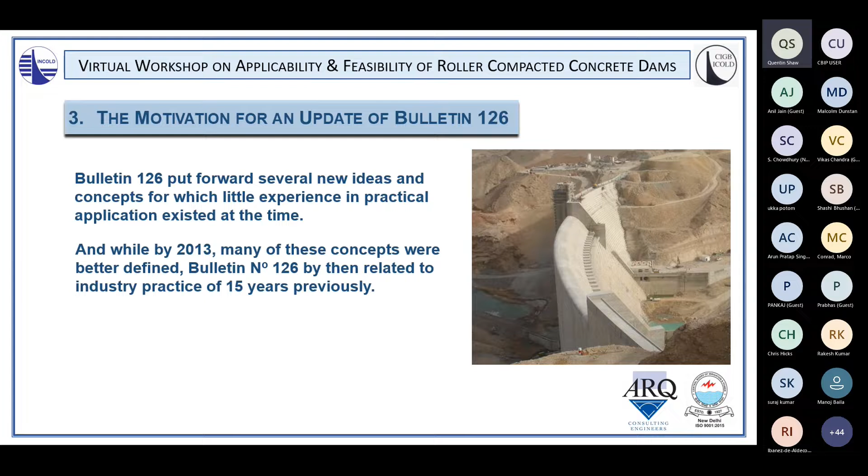And since then, many of those concepts — by the time an update of the bulletin was considered — were much better defined than in Bulletin 126. Additionally, Bulletin 126 essentially represented industry practice of something like 15 years previously. So it was clear that it should be time to update the bulletin, and particularly in that intervening period, it could be said very definitively that RCC had replaced conventional mass concrete as the conventional material and method for the construction of gravity dams.

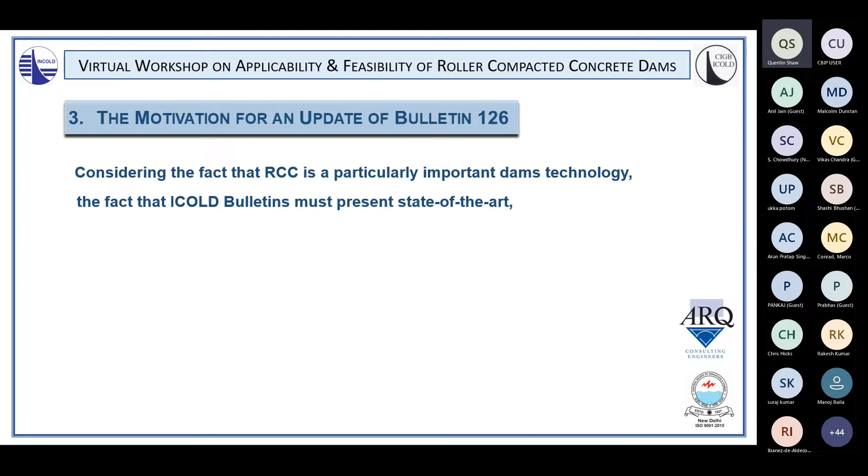Considering the fact that RCC is a particularly important dams technology, and the fact that ICOLD bulletins must represent the state-of-the-art practice, and the fact that the success of RCC dam construction is not often achieved, as stated by Dr. Malcolm Dunstan, and the bulletin is an important document in enabling the success — the implementation — of an RCC dam, it was decided to prepare an update of Bulletin 126.

While the basic framework of Bulletin 126 was retained, as the new bulletin preparation advanced, it became obvious that changes compared to Bulletin 126 were actually quite extensive, and Bulletin 177 was subsequently presented as a full new ICOLD bulletin.

Next slide, please. Just to talk about some changes in terminology made in 177 compared to 126: the term supplementary cementitious material, SCM, was used in preference to pozzolan.

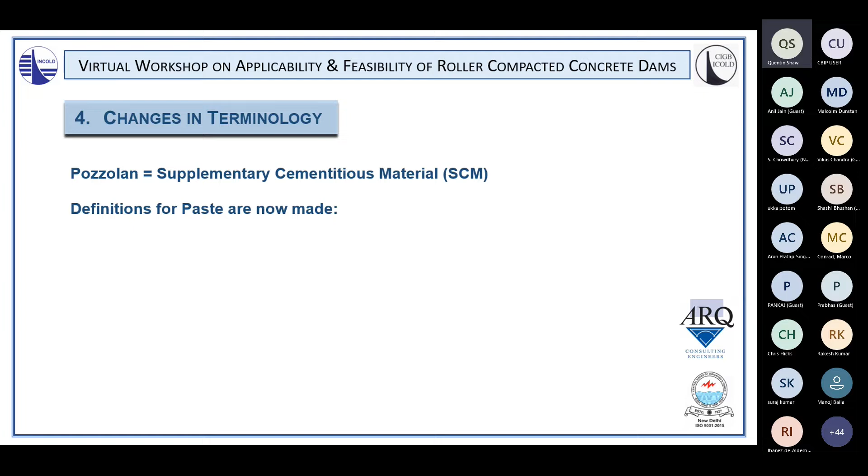Very important changes in the definition of paste are now made. We used to talk of high paste and lean RCCs, and when we talked about that paste, we meant cementitious paste, which is cement, supplementary cementitious materials, chemical additives, water, and entrained air. Now we differentiate between cementitious paste and total paste, where total paste is the cementitious paste plus the non-cementitious or non-plastic fines - the material less than 75 microns in the mix.

So as I mentioned, because of the above changes, the concept of high-paste and lean RCC is no longer relevant, although it does creep in occasionally, with many different levels of cementitious materials content now being associated with a high total paste content RCC. Next slide, please.

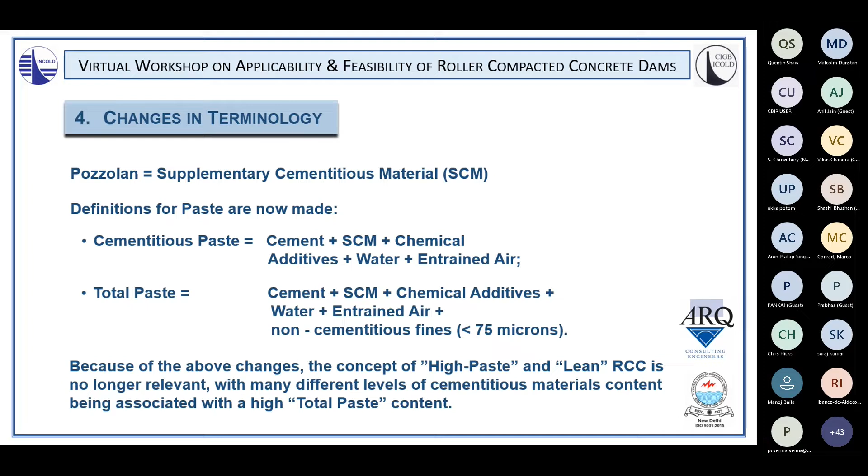For clarity and consistency, the terms lean RCC and high-paste RCC are no longer to be used, with the following being adopted: LC RCC, low cementitious RCC, using a total cementitious materials content of less than 100 kilograms per cubic meter. Then MC RCC, medium cementitious RCC, between 100 and 150 kilograms per cubic meter. And HC RCC, high cementitious RCC, with a total cementitious materials content above 150 kilograms per cubic meter.

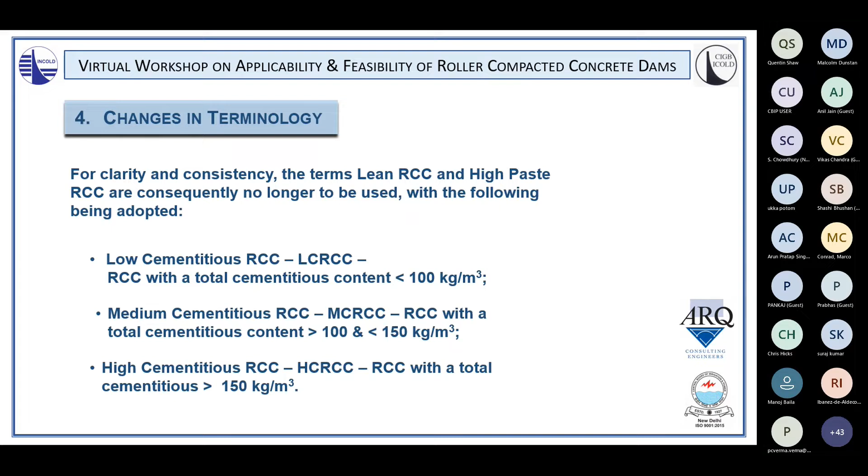A key requirement for the new bulletin was to also include various recent developments in technology, which I will just mention here as they will be covered in detail in the following presentations: developments in the understanding of the early behavior of RCC, design differences in RCC compared to conventional mass concrete dams relating to horizontal rather than vertical construction, developments in RCC mix design, developments in RCC construction techniques and technologies, developments in RCC arch dams, and developments arising from the use of RCC in more extreme environments.

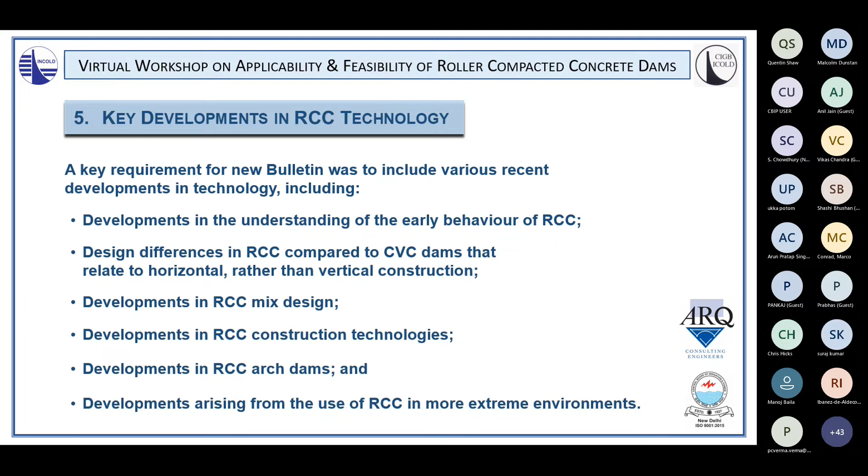Bulletin 126 contained a chapter on hard fill. As Malcolm Dunstan mentioned, this has now been separated under a separate ICOLD committee, termed the cemented materials dams committee. Nevertheless, it is a form of roller compacted concrete and really does have relevance in the overall scope of roller compacted concrete dams - there is a very large overlap, even though it is now covered by two different committees.

Next slide, please. So for the INCOLD workshop, the presentations have been structured as follows.

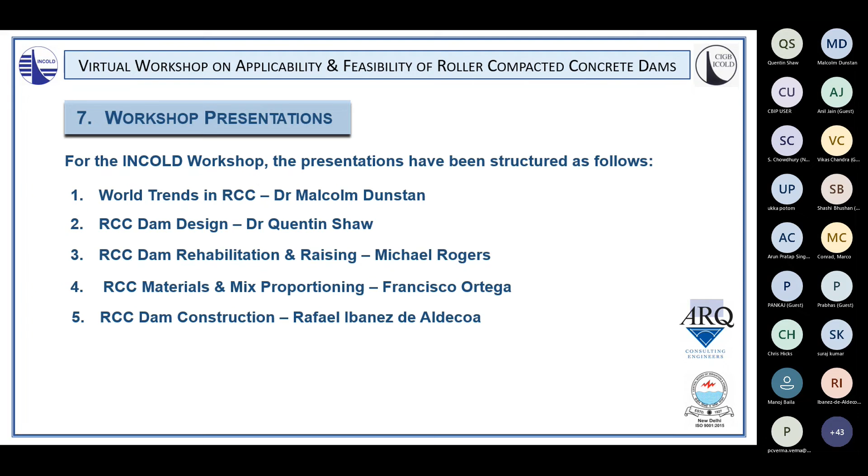And that basically ends the introduction to Bulletin 177. The presentations to be made as part of this workshop will actually be the most comprehensive presentation related to Bulletin 177 yet made, and I think certain parts will actually go slightly beyond Bulletin 177. So this INCOLD workshop is quite fortunate in realistically receiving a presentation that is absolute current state of the art in roller compacted concrete dams. Thank you very much.